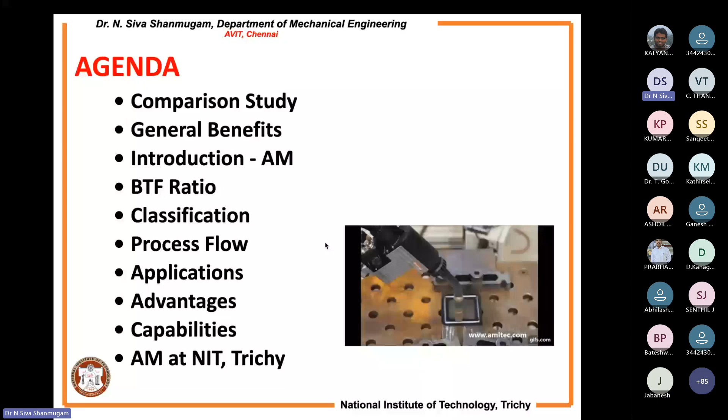Comparative study - what do I mean by that, shown in the next slide? And I have the general benefits of additive manufacturing. I'm going to define additive manufacturing by means of ASTM. Standards are highly essential - when you want to make a product, you have to fulfill the standard, then only universally people will accept and use your product for their application. The fourth is the buy-to-fly ratio, a very important terminology I'm going to discuss today.

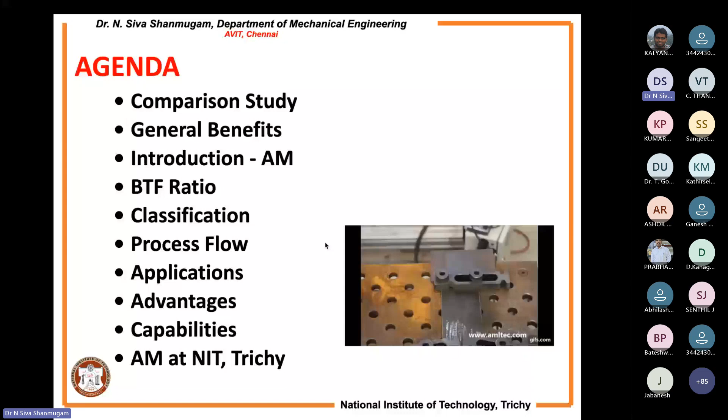And we have the classification, as my work is intended towards the classification of additive manufacturing. What do you mean by the process flow - how the process starts and how it ends? And what about the different applications available - where are the areas I can apply additive manufacturing to fulfill the requirements of people? And advantages, capabilities, and also what NIT Trichy is working on.

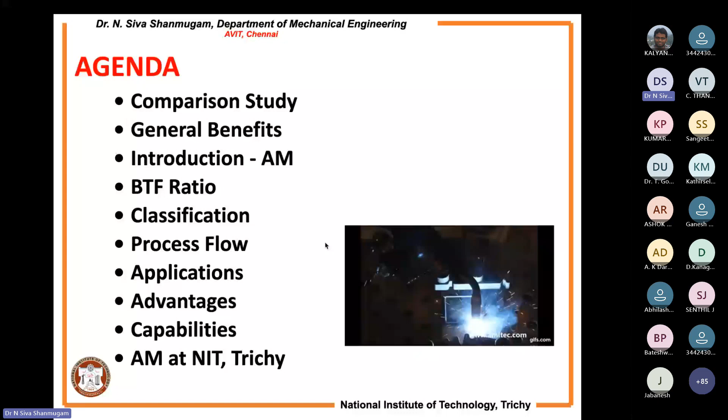See, we have a comparative study - a very important slide. You can take a screenshot from your mobile, iPad, or other electronic gadgets. Take the screenshot, very important slide with respect to the comparative study. Every time there is no need to go for additive manufacturing. Very important thing, please make a note of it, friends - no need to go for additive manufacturing every time, based on the requirement.

Sir, if I want to produce a single component n number of times, then additive manufacturing technology is not providing a good solution. In such cases, you have to go for formative - something like a casting process - you can go for high volume. Material is deformed to a desired shape using a combination of stress, forces, and melting. For example, injection molding involves forcing molten plastic into a cavity that sets to a desired shape upon cooling.

Sir, every time don't go for additive - based on the requirement, you can select the method. First is formative technology, something like high volume mass production of a single component of similar type, maybe in thousands or lakhs.

When you go for subtractive - sir, I want a highly precise component, my component should have some sort of tolerance, fits, warpage, or shrinkage - in such cases you need a highly precise component. For that we have subtractive manufacturing technology, using 5-axis VMC, vertical milling machines, or lathe machines to machine the component. We have so many varieties of machine tools available nowadays for subtractive manufacturing technology that will provide a highly precise component - 3D objects are fabricated by removing material from a starting block of material.

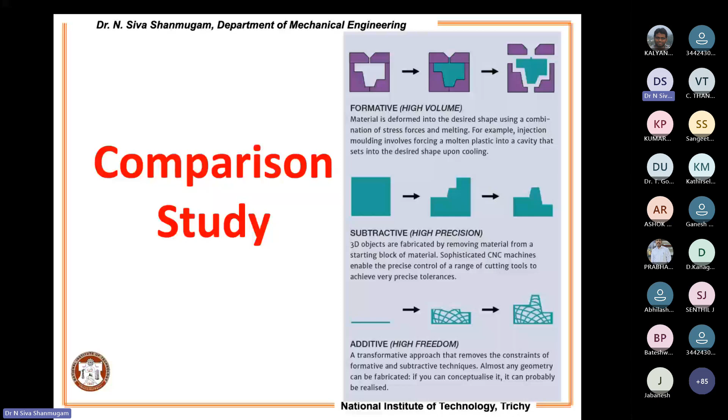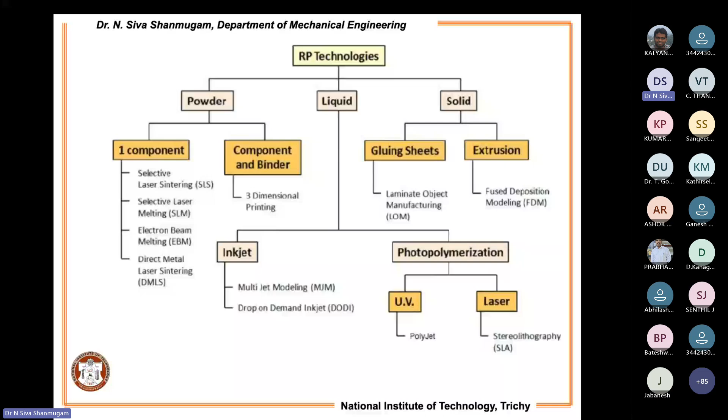I am not going to do that visualization. I am going to deliver it as an end product.

So I am categorizing this into two different categories. Please, my dear friends, this is a very important thing. I am really enjoying the opportunity to handle this session irrespective of the time. Even if you ask me to make it at 12 o'clock, the same enthusiasm will come because it is important. You are going to play with the product, not with producing a paper, especially in that additive manufacturing journal with an impact factor of 15 or 20, or Springer Nature something like 25. No, you can do your own job and you can do an enormous amount of consultancy work. Only thing is, what is the method you have followed? Sir, this is an opportunity for you to make a wonderful sort of thing. You can take it as a hint. Anytime you can approach us, or approach anybody working in this area, where you can make your wonders with the help of this machine too.

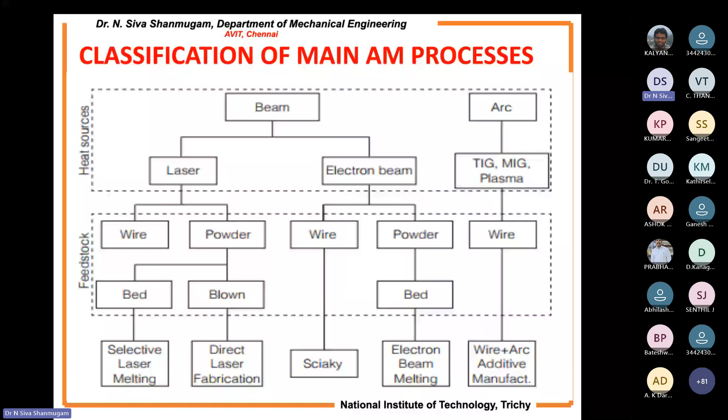Now I am going to share beautiful information with respect to the two pieces of information I have shared. Talking about the general benefits - reducing the time to create a prototype of a product itself from months to weeks and days. For that only, I have provided a preamble before getting into the real presentation, with respect to the conventional manufacturing method and concurrent engineering, to give an eye opener, to provide information with respect to time to market within a stipulated time.

Within days, within a week, you can reach your product to the market. You can fulfill the requirement of the customer within a week. A real tangible model of a future product is easier to design and present to the customer - a very beautiful sentence, a real tangible model. So you have a manufacturing method available, so whatever design you have, you can readily provide it to the customer.

The physical model is easy to correct. Errors are possible in the graphical representation of the product. When you do the modeling itself, you can find out these are all the errors that will come - you have to do the repatching of that work, and remove the bugs and errors with respect to the product. That is possible, that is feasible only with additive manufacturing.

Decrease in the cost of tooling, because you are going to use one machine where you are going to do the design and manufacture. Decrease in the cost of tooling and the cost of design iterations. The cost of product prototypes is lower than traditional methods, because you are going to provide only one product. There is no need of high precision, no need of high volume.

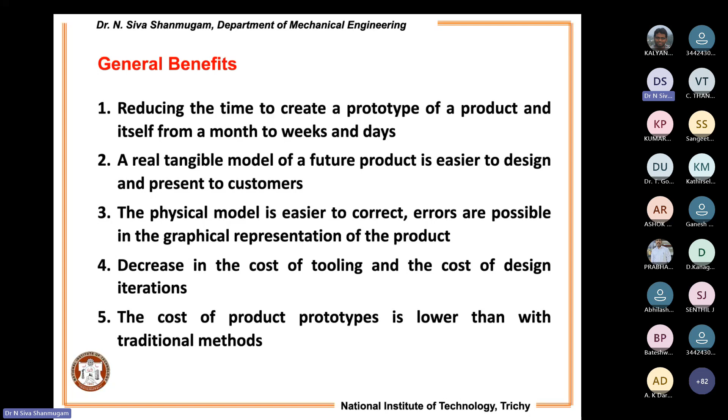As I mentioned in the comparative study of formative and subtractive methods, here I want to deliver it to the customer to attain the attention of the customer. I am going to deliver it to the customer. These are something with respect to the general benefits of additive manufacturing.

Very important, friends, as my friend Joseph Davidson provided, what is the difference between Industry 4.0 and 5.0? That is in a nutshell, and it is very important to provide as a concluding remark. What I have discussed so far, I have made into inferences, because it is very important to make some sort of inference at each and every junction. Otherwise, you will miss out on my presentation, what I am presenting here. So your attention is highly important, so that I can feed you appropriately.

So what we can gather are the benefits of a sound additive manufacturing strategy. Any method you can adapt. What are the things I have discussed with RP technologies and classification of main additive manufacturing?

I have an optimized product design. I can mitigate supply chain risk, because there is only a minimum component. I can fulfill the customer need as and when required. Reduced cost, reduced inventory - there is no need, because I can easily reach the market. I am not keeping it for a hundred goods at a time. As and when required, I am going to deliver it. Within a day I can fabricate and deliver it. There's no need of keeping it as inventory.

Reduced inventory, speed up new product development. Any product that emerges in the market, you can develop by means of this additive manufacturing technology. Increase operational efficiencies - efficiently you can use the system and the process flow. So this is something with respect to the benefits of sound additive manufacturing.

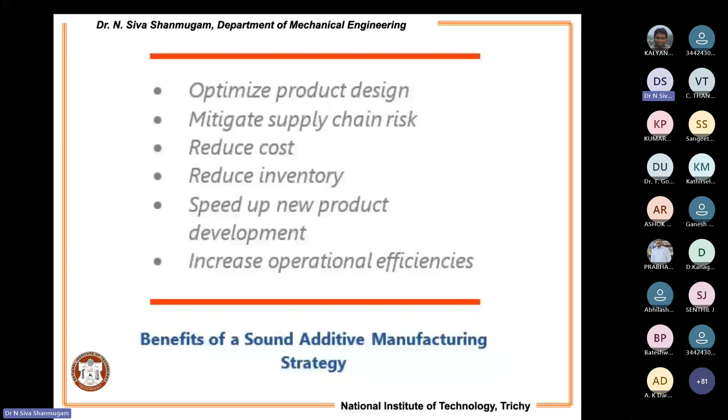Now I am not going to take all the things separately and give advantages, disadvantages, applications separately. I am going to compare between powder and arc. Powder means you can use laser or electron beam. Arc means you can use TIG, MIG, or plasma arc source, and you are going to compare which one plays a predominant role in the market. For which applications, what process can be suited - that I am going to list according to your requirement.

Coming to the part of definition - very important, because when you talk about a phenomenon, when you talk about fundamentals, you have to define it properly. What is the definition? ASTM, American Society for Testing and Materials, has defined additive manufacturing as a process of joining materials to make objects from three-dimensional model data, usually layer upon layer, as opposed to subtractive manufacturing methodology. A beautiful definition - from the definition itself, it is self-explanatory. There's no need of interrogation, nothing available in interpretation of the definition is required.

See, it is totally opposite to subtractive manufacturing. But if you ask me whether subtractive manufacturing methodology is required, yes sir, it is 100% required. When is it required? I am going to discuss that in the forthcoming slides, don't worry about that. Additive manufacturing is a technology that promises to reduce part cost by reducing material wastage. I didn't touch on that material wastage - I didn't provide any preamble or small introduction with respect to material wastage. I have discussed more about time to market, a reduced time to market. So the first advantage is reducing material wastage.

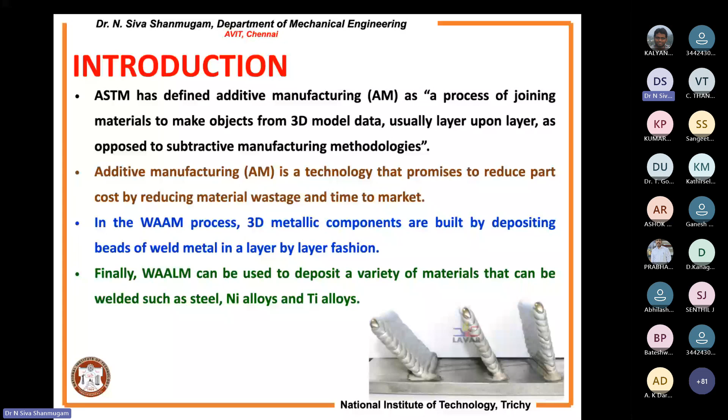What are the real things required? This technology adapts arc welding tools - TIG, MIG or plasma - and filler wire as a feedstock for additive manufacturing purposes.

Sir, is this new? No, sir, it is not new. It is 105 years old. The first patent was filed in the year 1920 by Baker.

Modern welding and automation technologies provide opportunities that were not previously available. They have introduced the concept from 1920.

After that, Cranfield University of UK - if you find time, please Google what they are doing at Cranfield University. I can claim they are the father of this technology. They are doing a wonderful job, working across the world and delivering components with different varieties of combinations, functionally graded materials. If time permits, just Google 'Wire Arc Additive Manufacturing by Cranfield University' and you will get so much information that will enrich your knowledge with respect to additive manufacturing.

What is my claim? High deposition rate. You have a very huge deposition because you can move the welding torch in terms of meters - 2 meters per minute. The latest is something like 3 meters per minute. The OTC Daihen people are claiming we can move the torch around 3 meters, something close to 10 feet, within a minute to deposit the material.

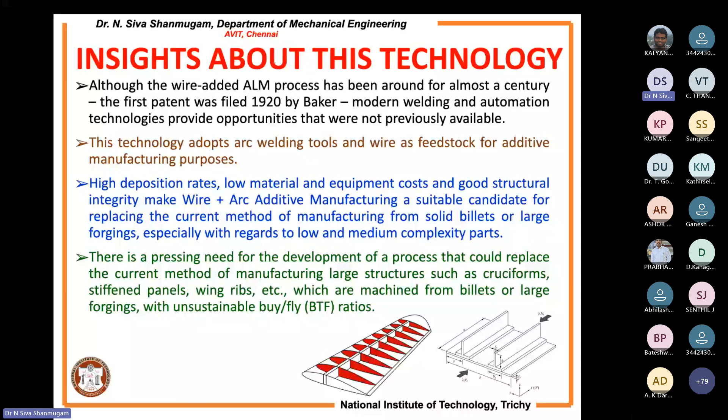There is a pressing need for development of processes that could replace the current method of manufacturing large structures such as cruciforms, stiffened panels, wing ribs. Entire aeroplane wings can be developed using this technology, which are currently machined from billets or large forgings, where I'm going to introduce the concept of buy-to-fly ratio - the unsustainable buy-to-fly ratio.

Please, friends, I'm going to take another minute. This is a very important terminology - you can put this question to any student. What do you mean by buy-to-fly ratio? It is a very important ratio - the ratio between the mass initial and the mass final.

When you go for a subtractive method, sir, I want to create this blade made up of titanium material. The end product size is something odd - for example, I can take a small rectangular block. The end product is something like 1 feet length, 0.5 feet width, and thickness of 20 mm. To get this product, you have to provide a block more than this size when you go for conventional subtractive manufacturing, correct?

When you go for subtractive manufacturing, the length is 1 feet, but sir, I want to procure a 1.5 feet length. The width is 0.5, so I can go for 0.75 feet or 1 feet width. Thickness is 20 mm, I can go for 40 mm.

Sir, what is that? 1.5 feet cross 1 feet into 40 mm, what is that density? What is that weight of the component? For example, weight of the block is something around 5 kg. When you machine it, it will be reduced to 1 feet length, 0.5 feet width, and thickness of 20 mm. So it is reduced to half along the thickness direction. So the weight is reduced from 5 kg, the final product weight is something around 2 kg or 2.5 kg. Now you consider 2.5 kg.

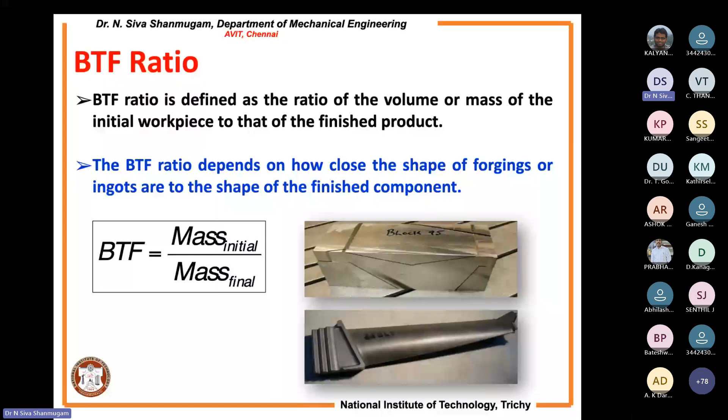What you are buying is 1.5 kg, but what you are flying is only 1 kg. So the buy-to-fly ratio equals 1.5 is to 1 mass initial, reduced to 1 kg as a final product. That is the ratio of the volume or mass of the initial workpiece to that of the finished product.

I'm going to play a beautiful video. As mentioned in the preamble, a single person is sufficient to do the modeling, import the design into the manufacturing area, the additive manufacturing area where they use powder as a feedstock and laser as a heat source for melting the powder to get the real shape of the component.

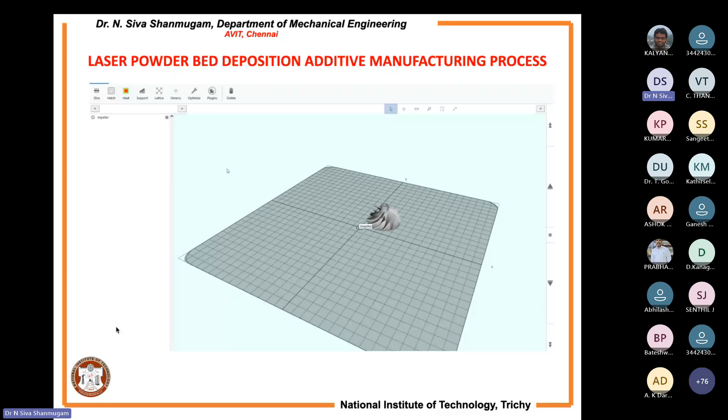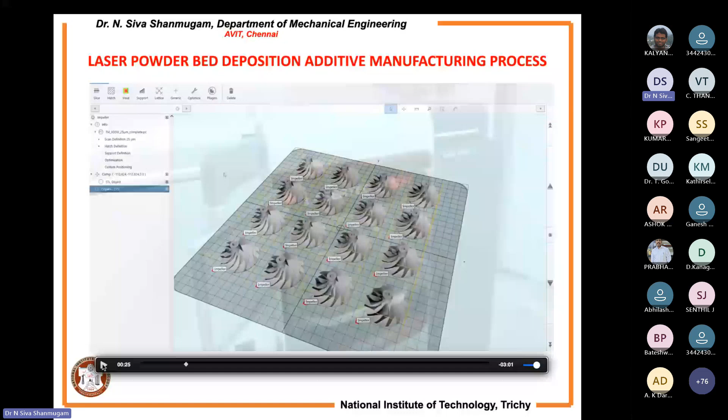Wherever you are placing that component, that area alone is heated up. Once it is solidified, you are getting the shape of the impeller.

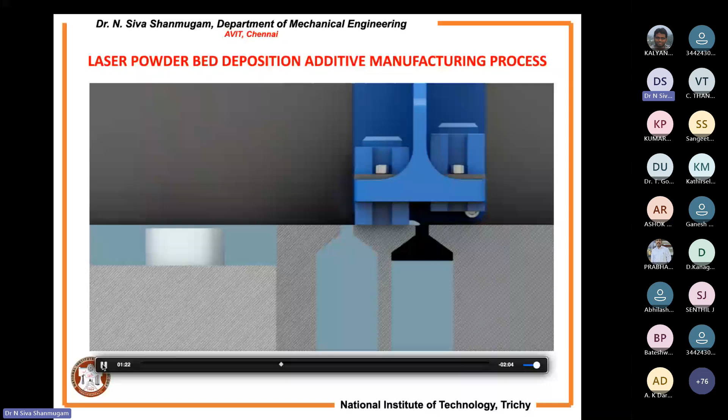It is clearly mentioned, as I discussed in the previous thing. So the component is built along the positive direction, and movement of the table happens in the negative direction.

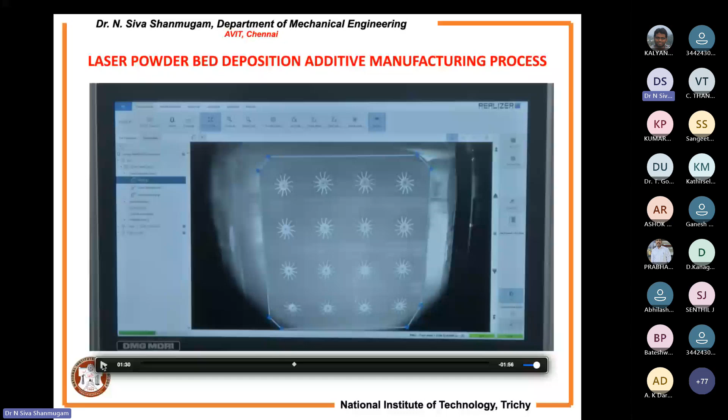The power, according to the requirement and the size of the powder that you want to melt, you can select the laser power. It may range from even now something around 1 watt to 20 kilowatts. You have a variety of laser powers because of the invention of fiber lasers, so from 1 watt you can operate up to 20 kilowatts.

So the unmelted powder may be sucked out by means of an exhaust system, like a normal vacuum pump. You can suck it and recycle this powder once again, because powders are so expensive.

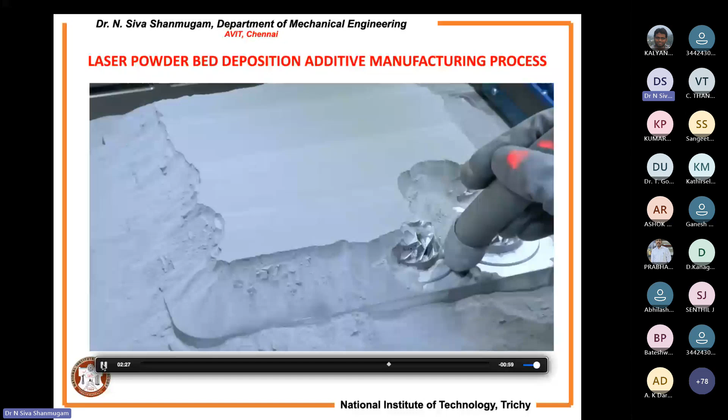You can see from this picture, from this video, it is an unfinished component. You need peripheral machining, a subtractive manufacturing method to give the finish of the component. That is why I repeat the same word I put previously: you need a subtractive manufacturing methodology, even though you are working on additive manufacturing.

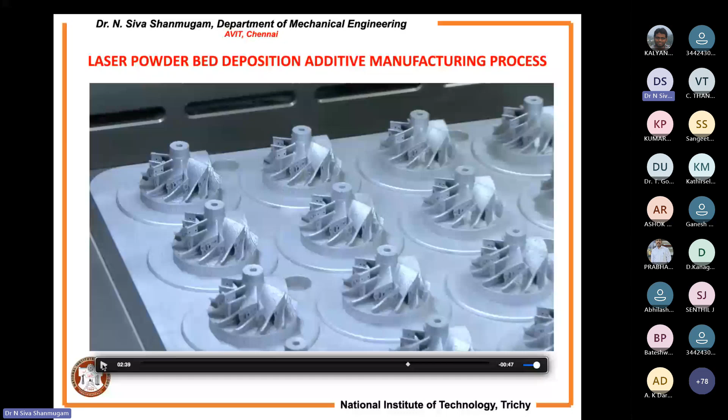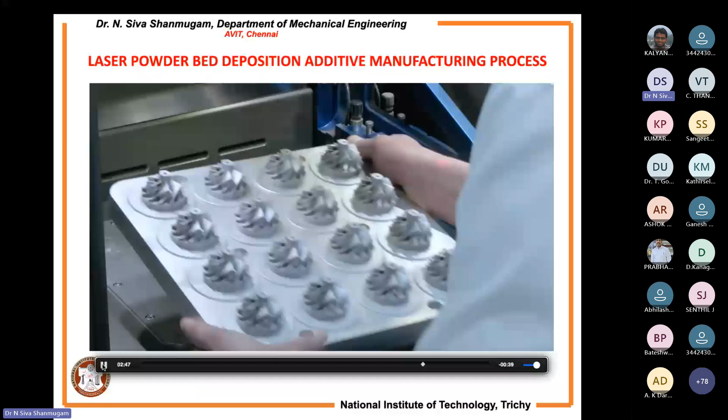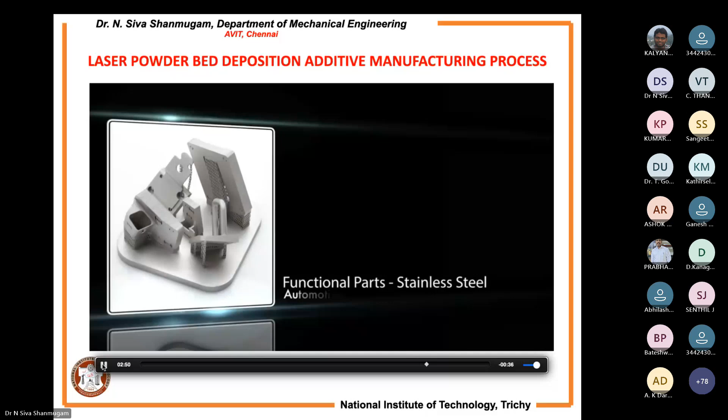You can remove, you can extract the component from the substrate. Once again, the substrate may be used for rebuilding of the component. Varieties of material for varieties of application.

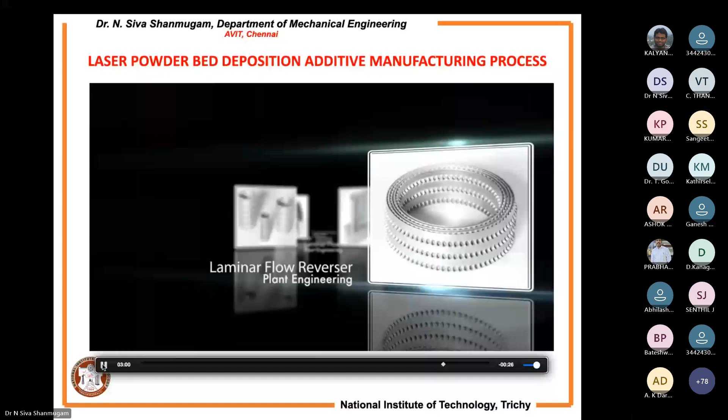Cobalt chromium, a sensor element, is especially used for dental crowns. This is for medical application.

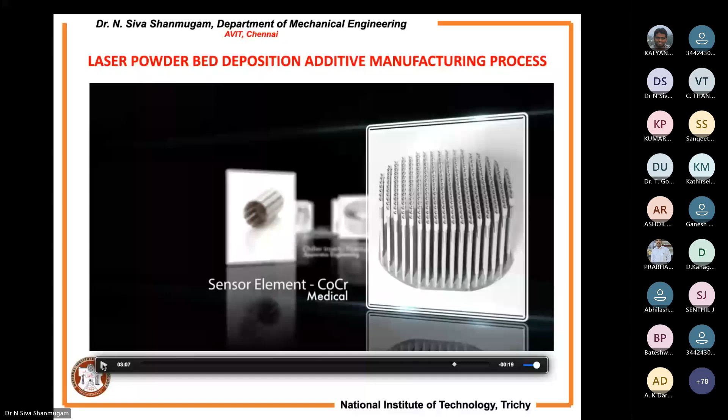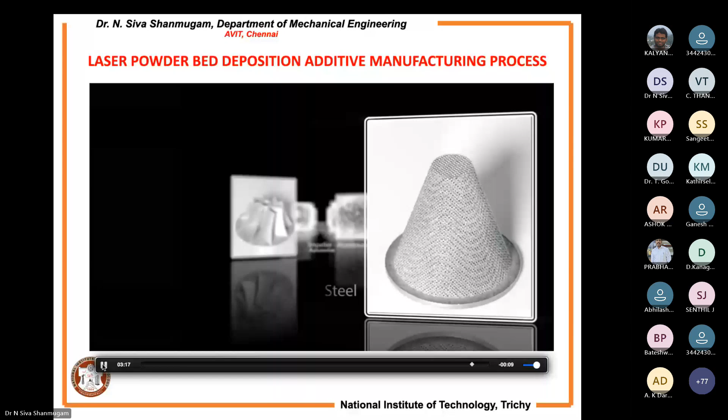This is a beautiful machine, we have a DMG Mori. This machine combines technology from Japan and Germany. Japan has this Mori machine tool, and DMG belongs to Germany. So they tied up and created this machine. Most of the aerospace industry equips this DMG Mori machine.

In addition, they have a hybrid setup. After printing, after making this product, you have a milling tool. The laser torch will be reoriented and the milling cutter will come and finish the component. That is called hybrid machining, hybrid technology. So now I have this beauty of additive manufacturing.

As I mentioned earlier, for low and medium complexity parts, this previous video showcased the high complexity part. In such cases you can prefer a DMG Mori, which is the technology we have in powder bed manufacturing. But here, when you go for low and medium complexity parts, you have a laser.

You have a TIG torch or a MIG torch or a plasma torch. You can put a substrate above that, and you can lay the number of weld beads according to the size and shape of the component.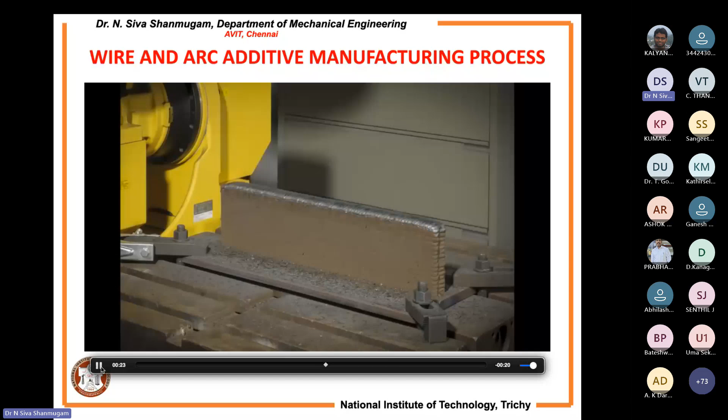See how beautifully the layers have been made. The bonding strength plays a predominant role here; you can achieve a unique strength, more than that of the original material. For example, if I procure an Inconel plate built on filler wire using this additive manufacturing, compared with the normal plate, the strength is very high because you are metallurgically orienting the grains, and the grain sizes are refined. Once the grain sizes are refined, you can achieve adequate strength.

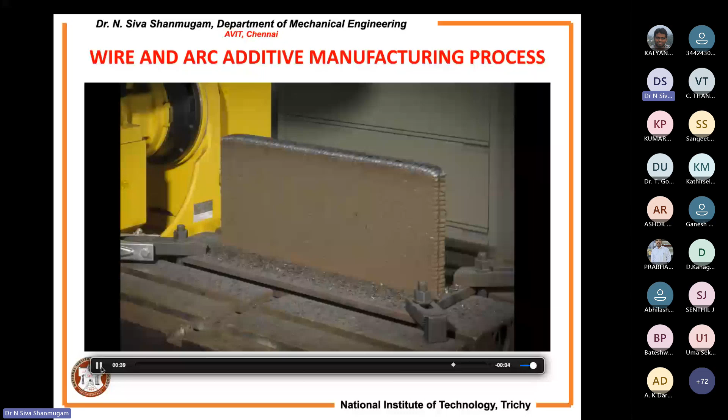A wall has been built; this is only for an example. Any shape you can build. I am going to showcase so many things in the forthcoming slides. When I compare these two, it is highly cost effective when you go for wire arc additive manufacturing. But the machine I showcased earlier is around 3 crore rupees.

Powders are so costly. When you go for a normal filler wire, titanium 64, TI64 is only 15 kg for 15,000 rupees. But when you go for a powder, minimum you have to get something around 25,000 rupees for 1 kg of powder. So when you go for high complexity, prefer laser with the powder.

Both are coming under direct energy deposition, the so-called DED process. Both come under the category according to the requirement, according to the complexity of the part, and you can select the process.

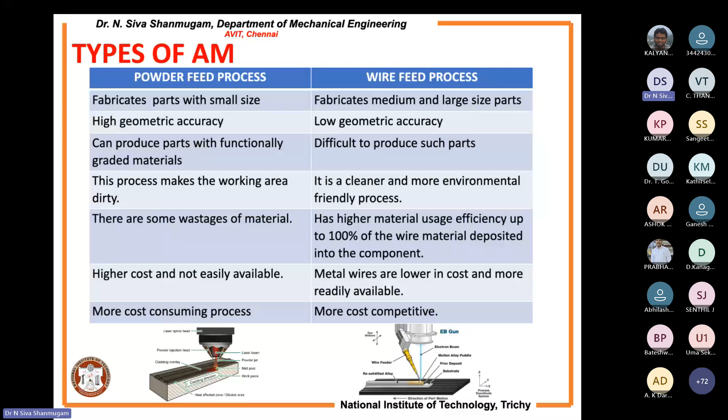Like Lord Vinayaga, see the beauty of Lord Vinayaga, you are getting different shapes, different names for the Lord Vinayaga. Siddhi Vinayagar, Valambudi, Edambudi, so many names are provided to the Lord Vinayaga.

Similarly, for this wire arc additive manufacturing, you have endorsed it with different names. It is called shape welding, shape melting, rapid prototyping, solid freeform fabrication, shape metal deposition, 3D welding. So varieties of names are provided to the same technology of wire arc additive manufacturing.

WAAM is better suited for low to medium complexity and medium to large scale parts, like wing spars, panel of the stiffened panel, for that entire pressure vessel - that you can do with the help of this wire arc additive manufacturing.

In addition, there is currently a demand for sustainable manufacturing. Everywhere, when you go to the market, you can call it intelligent manufacturing and sustainable manufacturing. It comes under the category of sustainable manufacturing and green technology.

It is not a hazardous process. If we have a smoke extractor or fume extractor, we extract the smoke and deliver it to the atmosphere. So the area where you are doing the additive manufacturing comes under the category of green manufacturing technology - an environmentally friendly process which has high geometric flexibility.

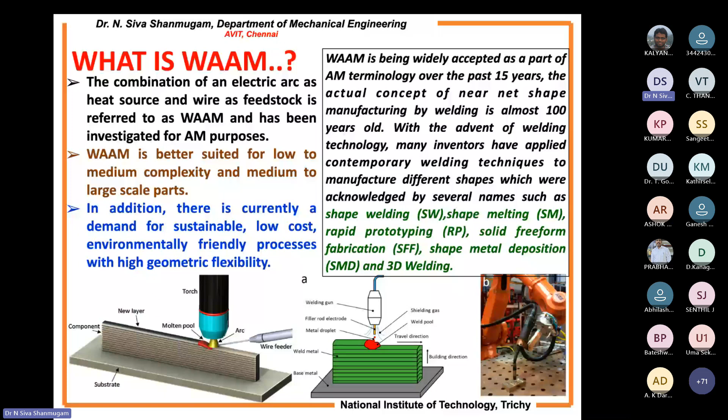Sir, with WAAM up to date, you can do a variety of things. As I mentioned, you can do a variety of processes to understand the fundamentals of WAAM for different materials. First, you can create a single wall, extract the sample - tensile sample, impact sample, fatigue sample, corrosion sample, wear sample - do an extensive study and report it.

According to the report, the industry or manufacturer will approach you: sir, I want this material, I want this WAAM wall for this material. Like that, they will come and approach you.

So to understand the fundamentals of WAAM, the behavior of a single bead multi-layer open loop structure is widely studied, focusing on numerous aspects such as the forming appearance, design, and residual stresses induced in the body.

Because we are using welding, you are heating the material and allowing it to solidify. So heating and cooling cycles lead to induced residual stresses into the substrate. You want to reduce the residual stresses to avoid distortion of the substrate material.

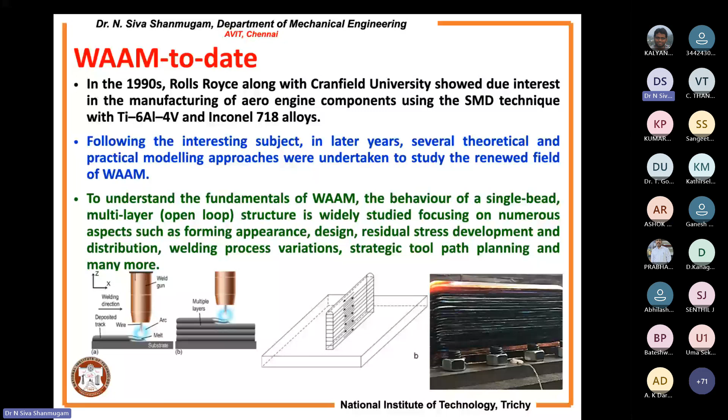Welding process parameter variation is studied with the art of design of experiments or using ANOVA analysis to find out the parametric effect on the weld bead geometry. So many things we can do with the help of this WAAM process.

As I mentioned, this is the process flow - a beautiful process flow. It is applicable for all manufacturing processes, starting with the CAD model, orienting the CAD model according to the WAAM, because you have to do the final finish of the component.

For that, you have to give the cushion effect. If the thickness is 1 mm, you want to increase this to 1.2 mm. That 0.2 material should be machined to get the finish of the component.

Design adjustment of WAAM, do the CAM toolpathing, that is finding out the G codes and M codes, how to deposit the material, assign the process parameters, and do subsequent simulations to find out the effect of process parameters.

As I mentioned earlier, the residual stresses, how the stresses are induced in the body, what about the temperature - it is reaching 2000 degrees or less than 1500 - like that you can do all the finite element simulation and do the WAAM manufacturing.

Then you can go for shape and deformation control and then go for CNC finishing of the component. Finally, you can use coordinate measuring machines or well-automized CMM machines to check the component and get the dimensions of the finished component.

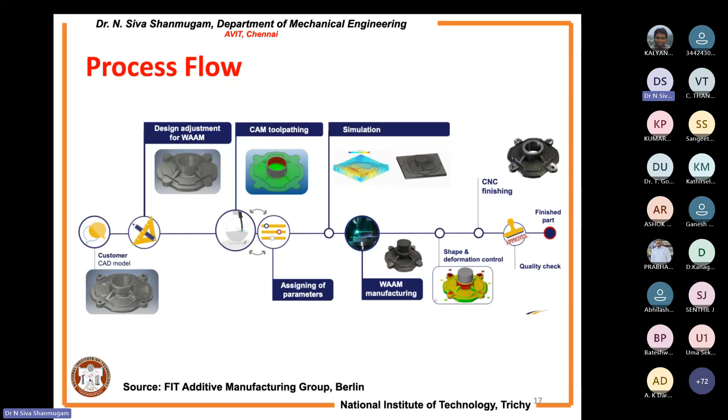This is how it has been carried out extensively, starting from the scratch, from the model to the real product. The finished product can be endorsed, checked, or verified through the customized requirement or according to the requirement of the customer.

In addition to that, you can create a three-dimensional digital model, machine it, and then go for a three-dimensional visual inspection, whether you have an inherent flaw, a pore, or a porosity. You can do online inspections and finish the component and deliver it to the customer.

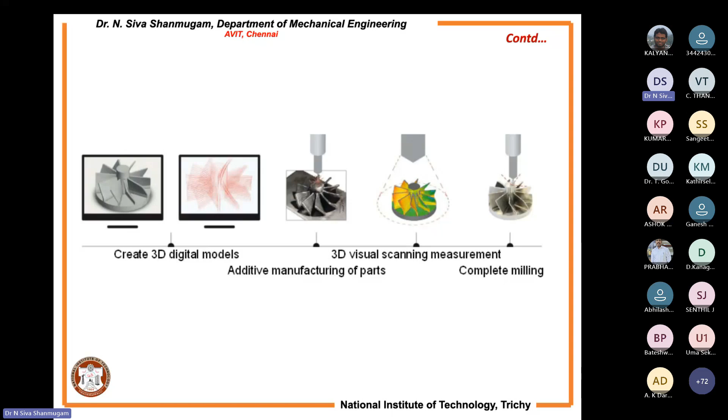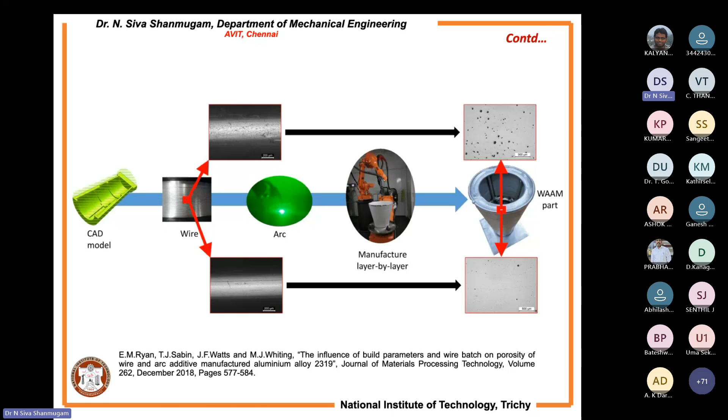Not only on original products, you can also work with the human body. Biomedical implants and prosthetic components are nowadays being printed through additive manufacturing routes, by laser as well as by wire arc additive manufacturing. According to the requirement and precision needed, you can select the process, either with powder or with arc technology.

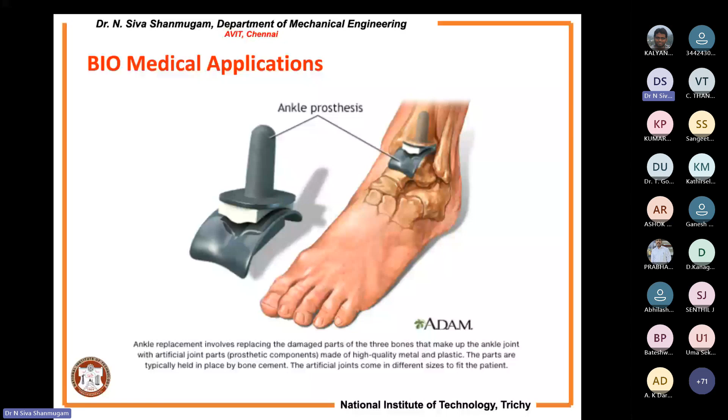If you want to get a 21 kg finished part, you have to put in 250 kg when you go for conventional machining. But when adapting WAAM technology, you get 21 kg with 24 kg near net shape, a ratio of 1.14:1, deposited in 24 hours for the build.

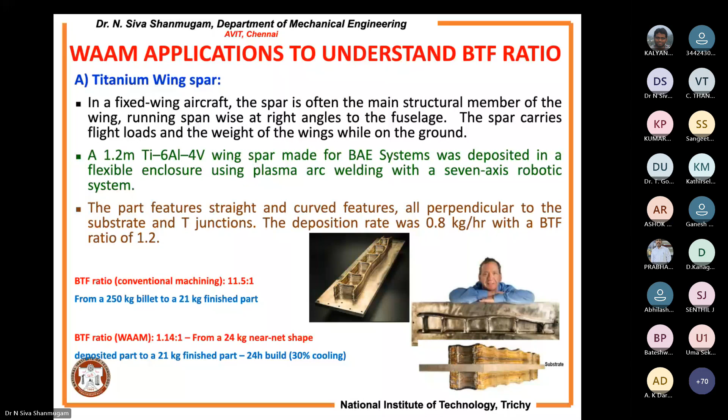For the entire day they spend building out the material, 30% of which is kept for cooling, because for subsequent processes, one layer above the other, you have to keep a dwell time to allow it to solidify. If you do it subsequently without that dwell time, you don't get good strength as per requirement. Another beauty is you can play with that.

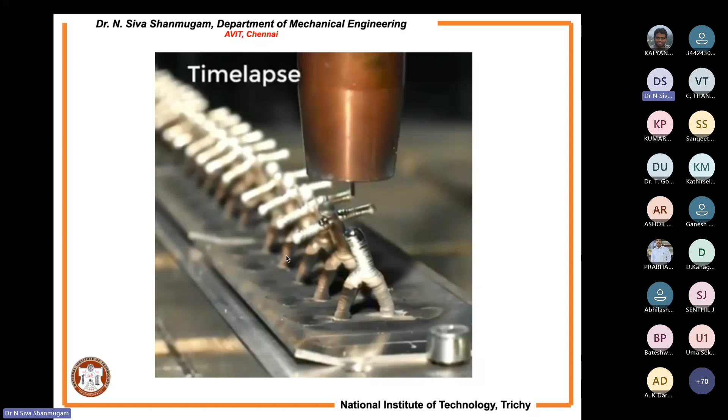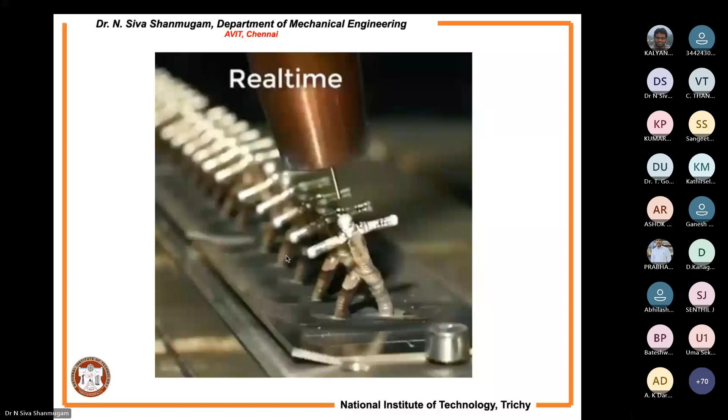Small spots are required. Very small spot welds are sufficient to create a structure, a human structure, a skeleton of a human being. See, the head has been made, now hands are developed. By single spots, one above the other, you can get the beauty of that structure. Within 1 or 2 minutes, you can complete this structure. That is the beauty because of the high deposition rate of the wire arc additive manufacturing process. This is one of the applications I mean here.

This is a very important point, friends, so please open your eyes. It is also used for repairing materials, a very important technique. This is the only technique available in the world where you can go for repairing.

For example, I have a gear of size around 250 mm diameter. I have made a wrong hole at the center, instead of 10 mm, I have made it 12 mm, so by 2 mm I have made it wrongly.

So what we can do, you can put a robot very close to that. According to the material, you can select the filler wire, deposit the filler wire for 2mm, go for a final machining to get the finish of the component. You can reuse the gear once again instead of replacing the entire gear. That is the beauty of the process.

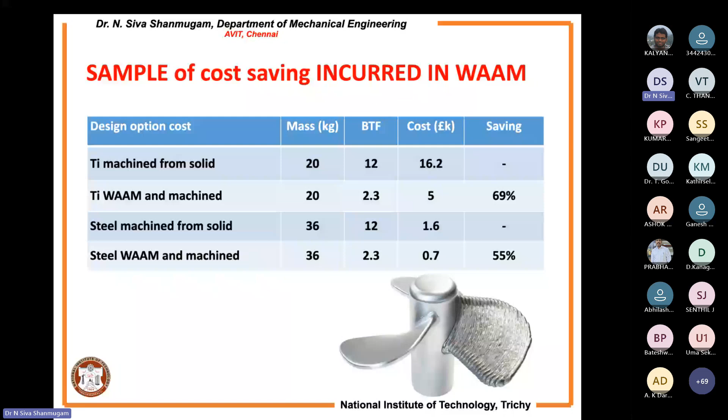As I mentioned earlier, varieties of material you can build. You can also work with refractory materials. The melting point of refractory material is around 3000 degrees centigrade. That is possible because the arc energy we are developing is around 10,000 degrees Fahrenheit. Even you can achieve 20,000 degrees Fahrenheit.

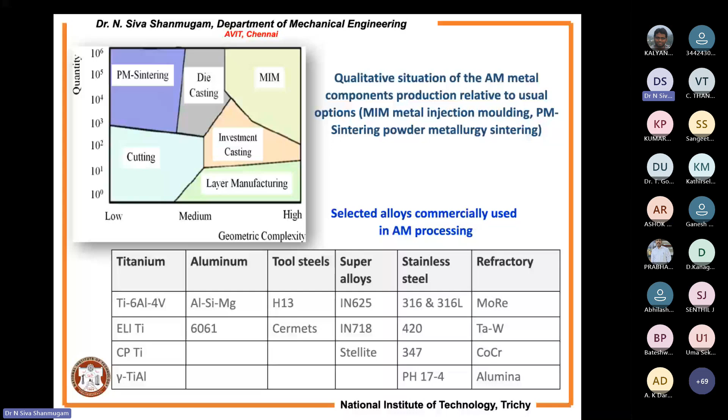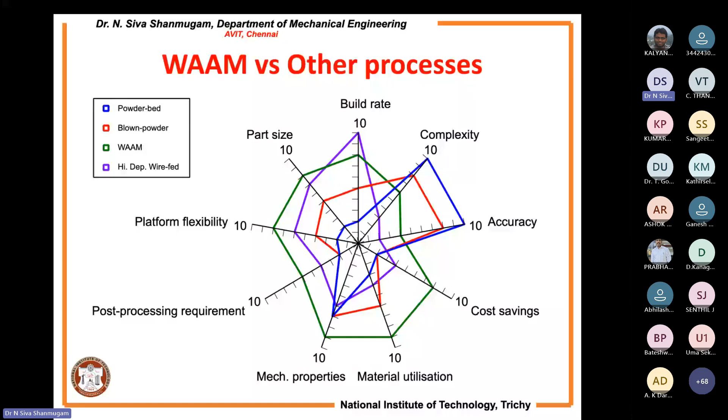So deposition strategy - where you have to deposit from left to right or right to left, from top to bottom or bottom to top. Based on the deposition strategy, you can achieve different microstructures. Once you achieve a different microstructure, it directly leads to the strength of the material. It is directly correlated, directly equivalent to the material property you could achieve with different deposition strategies.

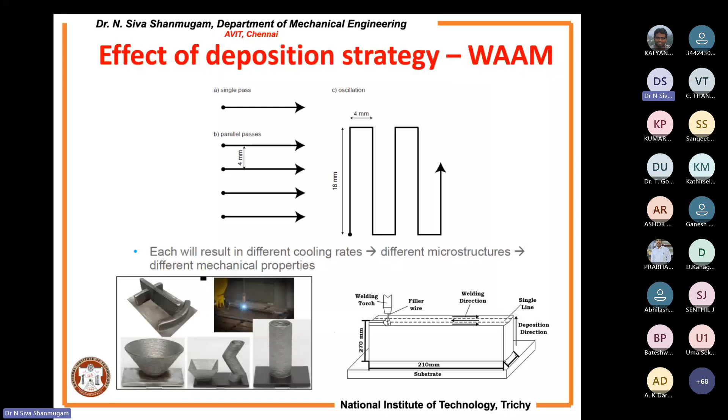And as I claimed, once again I'm making the claim that this is the only process available in the world where you can orient the torch in different directions. See, the direction - you can horizontally build the material, vertically build the material. Even you can do some research for building the material in the overhead position.

That is possible because of the solidification, because of the welding technology. You can lay the material, deposit the weld beads from left to right, right to left, bottom to top or top to bottom. Normally, as a welding engineer we orient the torch with respect to position - 2G, 3G position, even you can go for a 6G position. That is possible with respect to that.

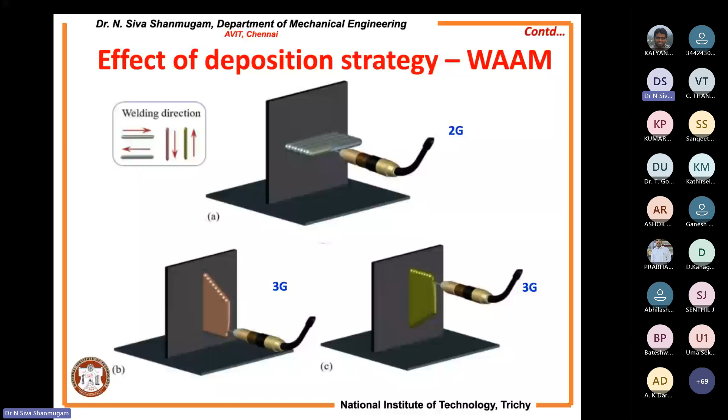And coming to the number of case studies, sir - without case studies, how can I present my technology? Here, this is one in Rotterdam, especially in Netherlands - they have deposited nickel aluminum bronze alloy, something around 298 layers. They use it for the crane hook.

See, when we are teaching CAD, the crane hook is one of the difficult parts to create in SolidWorks or with Autodesk Inventor, etc., because all the cross sections are different from one another, correct? So you can easily do it by means of this WAAM technology. It is proven - the entire weight of this crane hook is something around 400.

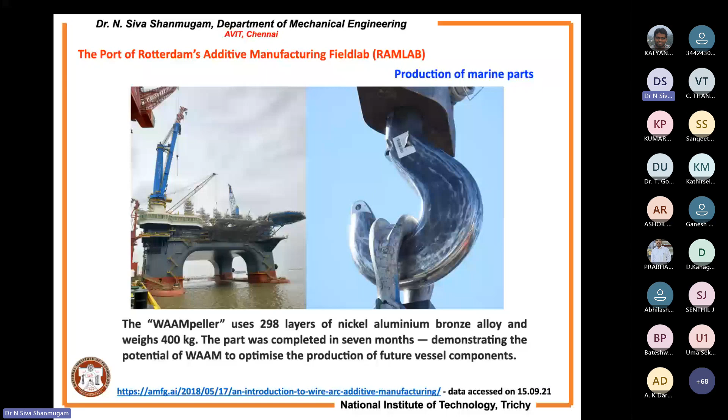I have provided the link information. If you want, you can get more information, especially used in marine applications. What is the problem in marine applications? Where we have seawater, a salty water, you can have corrosion, chloride attack will be there. So to avoid that, they are using a nickel aluminum bronze material to avoid the corrosion. Further, it will end up with erosion.

And this bicycle frame, this entire bicycle frame is created using this WAAM technology. And the Dutch startup, it is called MX3D. Especially for startup people, this technology plays a predominant role.

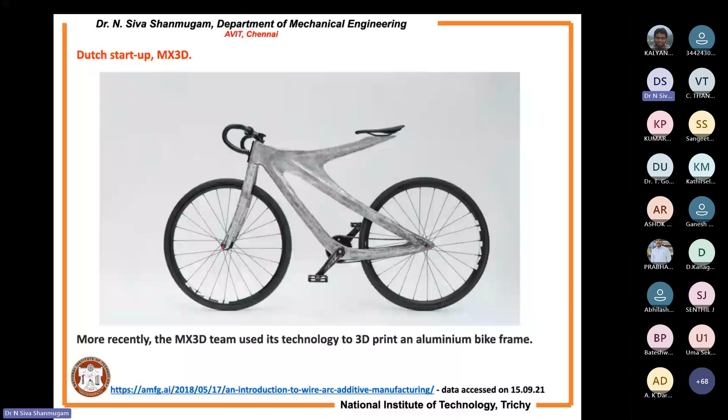And what we are standing here for - because just sharing literature information to all is nothing helpful, sir. We have experienced people here. We experienced ourselves by playing with this robot. I want to thank OTC Daihen for providing this welding robot, 6-axis robot, to NIT Trichy. And we are playing with different varieties of material.

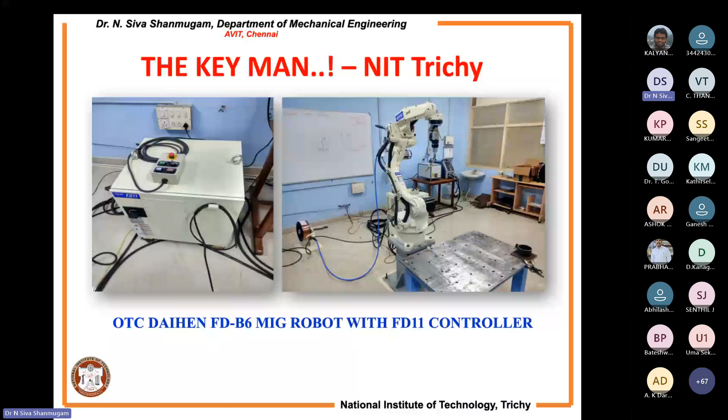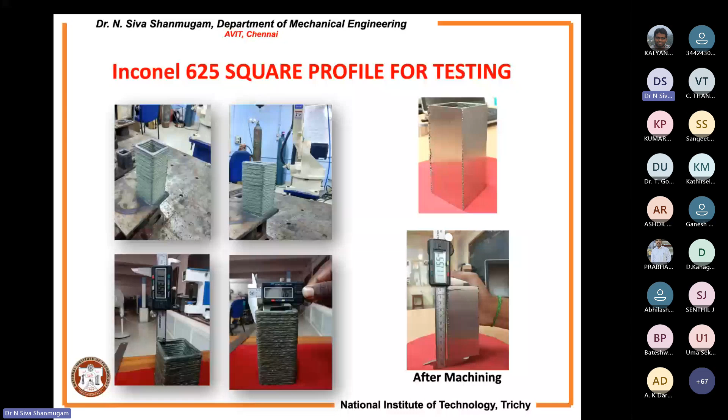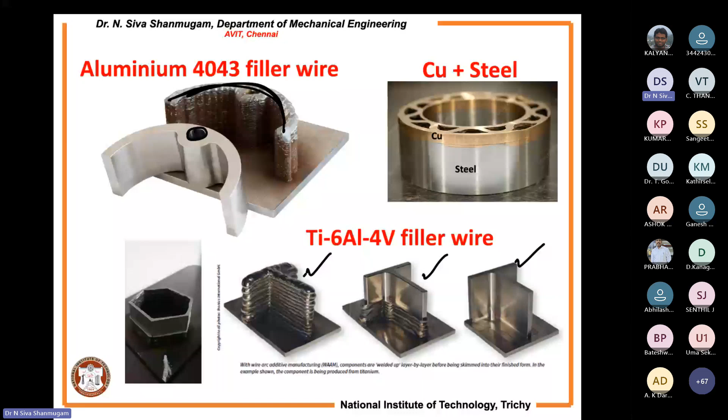There is another material where you can go for a combination of materials - half machined, bottom kept as is to find out how peripheral machining is required to get the finish of the component. It is not only for aluminum; you can go for a filler wire of titanium, carbon steel, or a combination of material like copper laid over steel. That is also possible.

We tried this, obtained the results, and the article has been published in open forum - you can check it during your free time. We are also working with nuclear material.

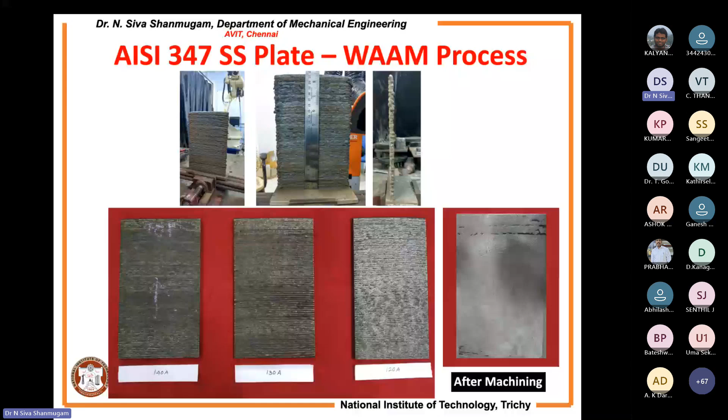It is something like a niobium thing, similar to 347 SS. We have created a wall and machined it to find out the buy-to-fly ratio. From that, we extracted samples to find the strength of the material. This was done with the help of Cranfield University, as I took information from Cranfield's literature.

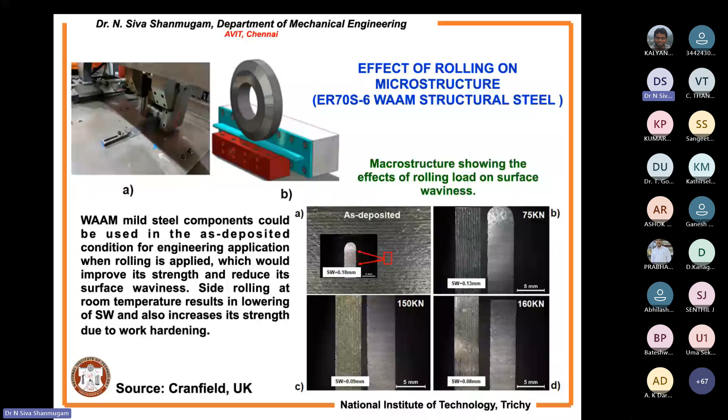They are going for post-processing - after completion of each layer, they roll the material, putting rollers to induce strength in the material. They also do this to get the finish of the component. This is one of the literatures I took from open literature.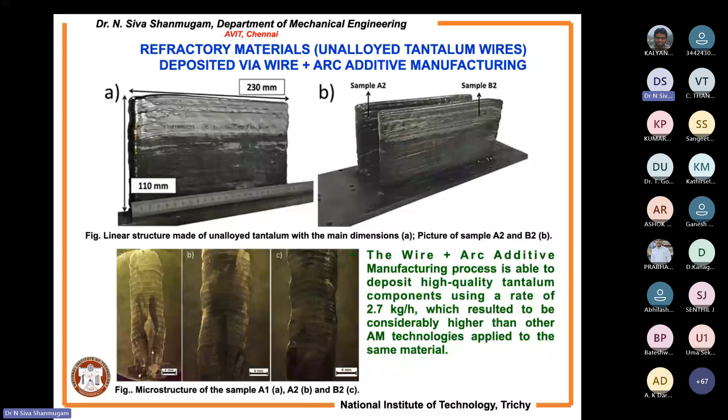Something like refractory materials - they have heated it beyond 3000 degrees and deposited the material. High quality tantalum components are also possible by means of additive manufacturing.

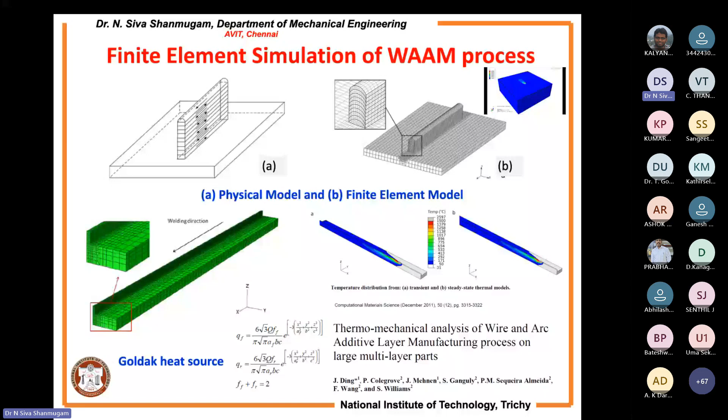As I'm a finite element simulation person, it is very important to find out the stresses induced in the body. This is the base literature where we gathered that information, and with the help of these literatures, we simulated it. I want to thank my scholar, Dr. Arun Kumar.

This gives the awareness needed for checking the process parameters and deposition strategy. You can predict temperature distributions, find out residual stresses, and the resulting distortions by doing finite element simulation while changing the process parameters. That is possible only with a virtual platform or by means of numerical simulation packages.

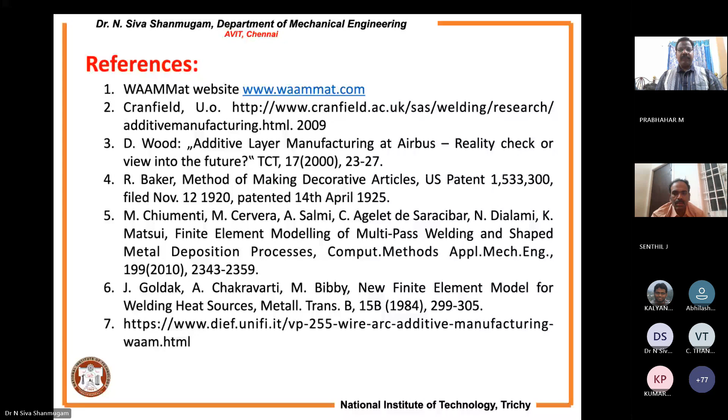Thank you, sir. It was a most informative and very elaborative presentation. The way you presented showed your expertise on this domain. With this note, I open the session for questions.

We will take it in the positive way that you explained everything required. Otherwise, you can just open the chat box - I'll open my chat box. If time permits, you can share your thoughts. I'll open it for another 2 minutes; if you type anything in the chat box, I'll readily answer the queries posted there. Please, yes sir, yes sir.

So if there are no more queries, you can put the feedback - something like whether it was totally a waste or totally good. Anything, just open it and put something in the chat box. I am very interested to see what is there.